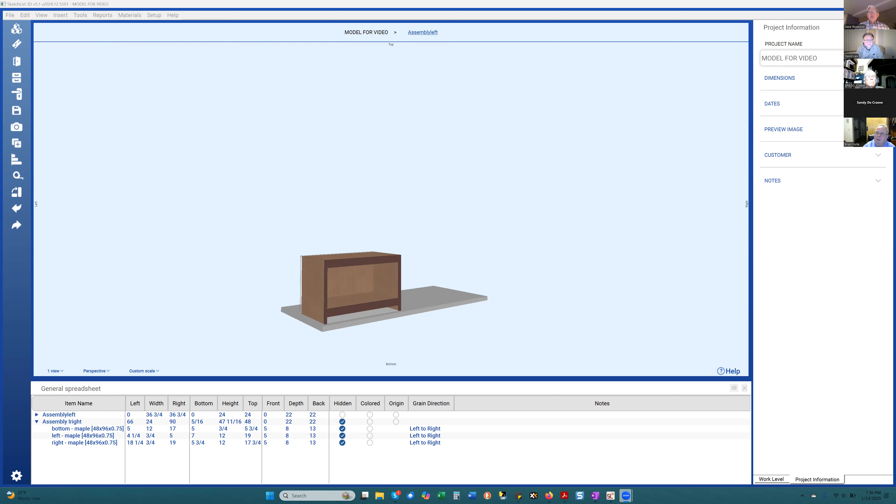That are unique to the way that you build, and then when you're putting something together, and I'll share my screen in a second, Sketchlist is really geared for that. Let me just figure out share. Okay. Yeah, you can see my screen now, right? Yep, all right.

So if you took, for example, this box, right, and you're saying whatever size it is, it's 36 by 24 by 22. What you can do at a minimum is say, in reality, this is a 60-inch carcass, if you would. And you can go in to add objects from the library. This is just a kind of junk collection of mine, but I can come in and say I want to put in...

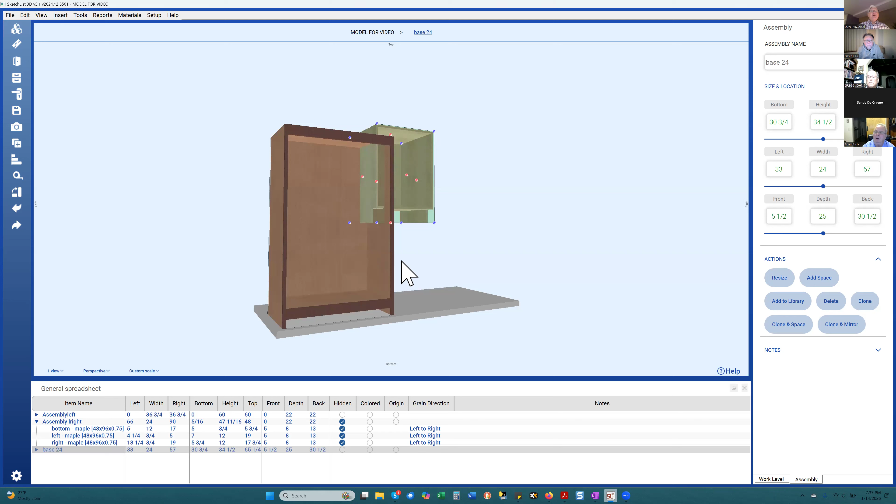This base. I'm kind of making this up on the fly. So I put the base in, and I've got another piece, and all I have to do is align them. To align them, the tool in Sketchlist for alignment, for location, is the blue dot. I right-click that, I copy its values, I come here, and I take that, and paste the value like that. Then I could take this and change its size, so let's say 36, like that.

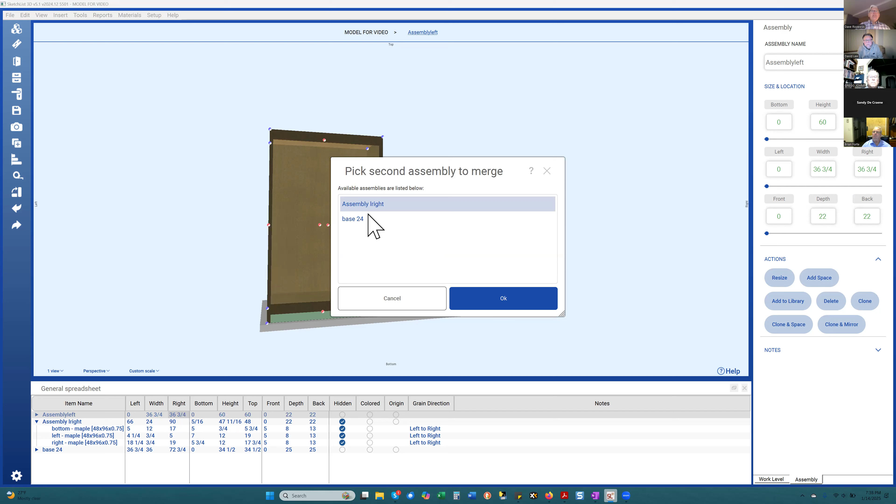And I can even go so far as taking these and, let's see, so we left, I can merge. I can merge these two assemblies and then come up with one assembly that contains the building blocks. And with the library, you can save standard objects down to the board level.

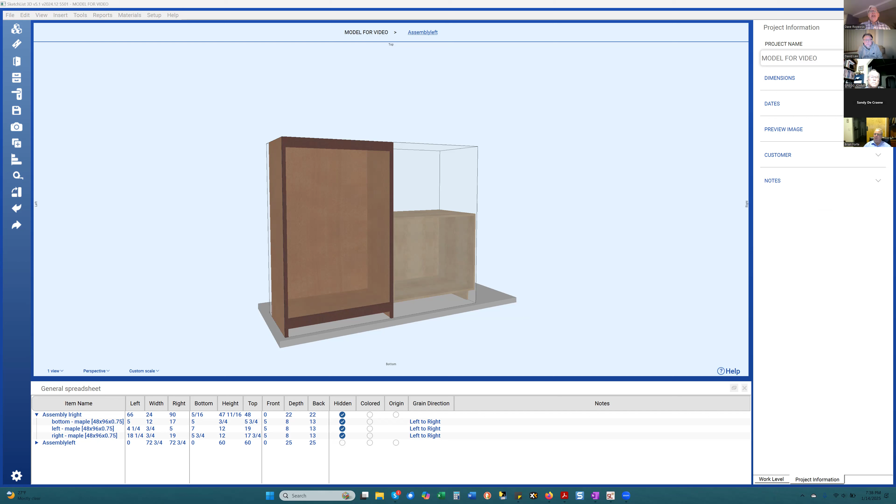If you have maybe a cove molding or something like that, you make it once, then you bring it in and modify it as you decide, or as necessary, and you could make virtually anything. I did a video years back where I took just a box like this one here, and I made it into an entire kitchen in about 12 minutes, because all I was doing was bringing in saved objects and modifying them.

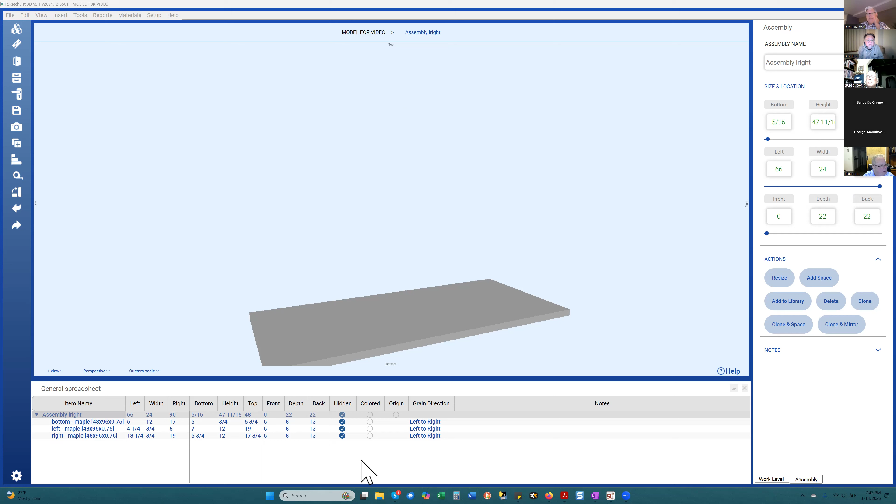So what my solution would be is our notes. Let me pop a board in here, because this is getting us right to where we're going. No, I agree with you. I was just wondering, is there a way that we could look for a standard dovetail?

And then after that, it's just a question of templating. I can create templates, but I just want to be able to visualize in the project within that assembly that an employee can see this is where a dovetail goes. Right, and then they can look at notes for the template they need to use. Exactly, exactly. How big is this board?

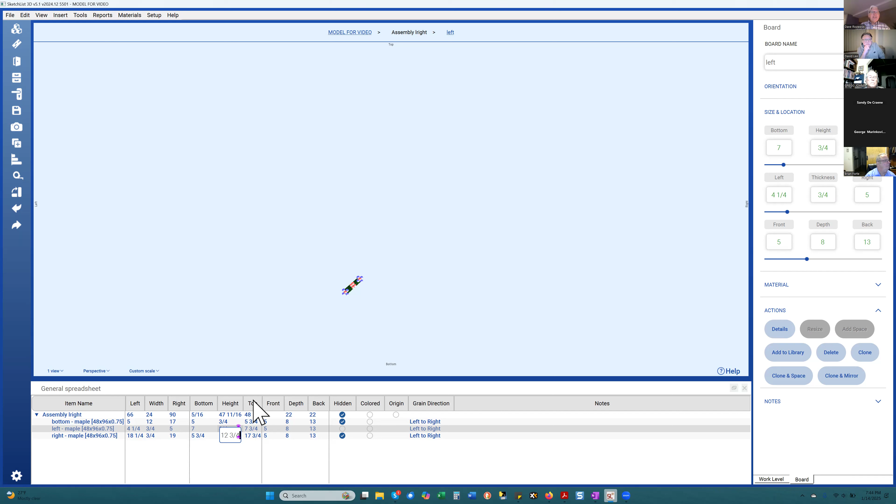This board is 12 inches tall. So say I wanted to make it big enough to have some dovetails cut on the top. Well, what I really wanted was 12 3/4, like this. I'll get into these tools later. So now you've got essentially an extra 3/4 up there. And then you could put a note in.

Oh, I'm sorry, I'm not sharing. Am I sharing? You are. Okay, you could put a note in here. And notes are actually very powerful, because you can put those out on the cut list and the parts list and so on. And you can say dovetail, 10 degrees, or however you want to specify that.

So when you get your parts list coming out, you say, well, include the notes. And then the guy who's cutting this says, oh, okay, I got it, I know what that means. So the difference is we don't represent it visually. And it would be a time, I don't know.

I hate to say this, but dovetails are not a highest priority, because not everybody works with them. But it is a personal priority of mine. Every time I assign stuff to developers, dovetails just end up at the bottom of that list, I'm sorry to say. But if you're going to work on it, I'd be happy to hear from you and see what your needs are, because someday we'll do it.

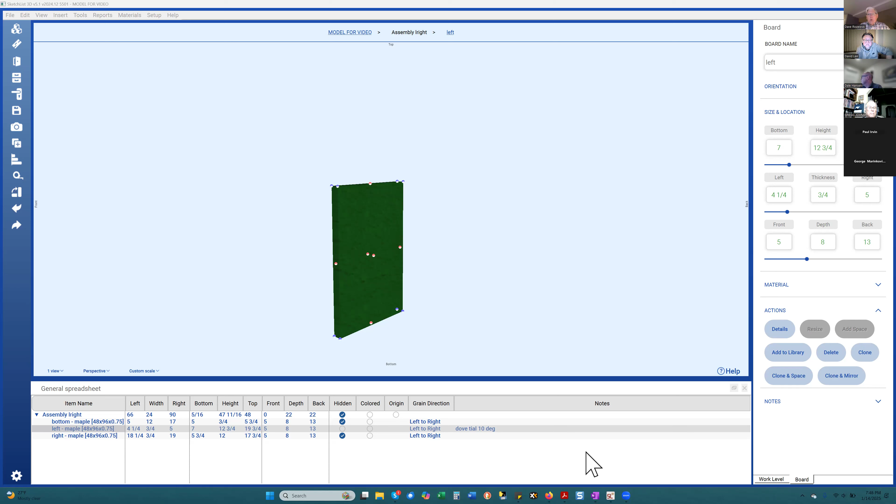Okay, that's the nature of things. Sometimes somebody does something a little bit different. It's a great product, I love it, and it's just like, oh man. Well, it's funny, I'd say this for a long time, that people are like, quote, buying software, but honestly you're kind of buying into a relationship, because we can't do everything perfectly all the time and things go wrong. If you just communicate, we'll say, all right, well either we're committed to fix it or we're not. But I'm personally very committed to fix things. So the communication is key. It's really key. We get so much good feedback in terms of problems and ideas from users. It's just very rich for us.

So do that and let me know for sure. Okay, we'll do. I don't know if you have my phone, but there it is, it's in the chat. Anybody can feel free to call me if you have something to communicate.

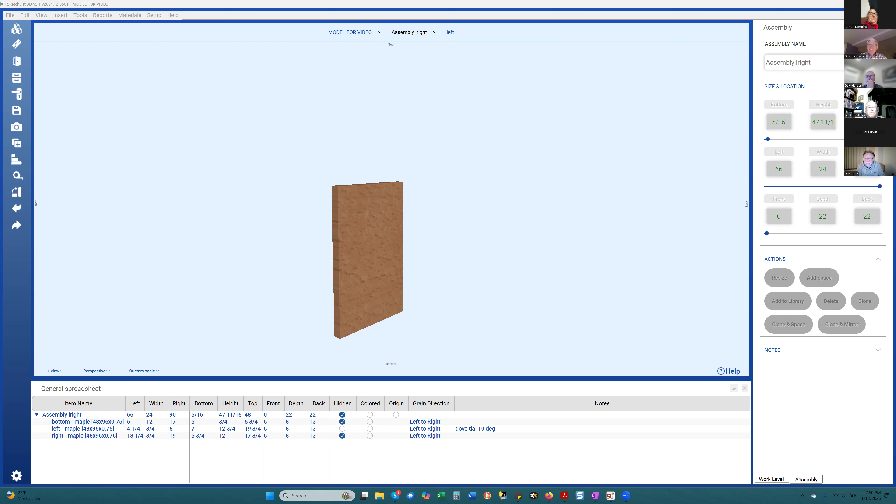Yeah, I was working in a drawing that I had done a couple of months ago, messing around with all the different things you can do with this. I get amazed, but sometimes I'm amazed myself at how I get caught in a spot and can't get out of it. Right now, I can't click on my chest of drawers on a board to get all the little dots around it where you can stretch it and all that kind of thing. I don't know what I did, but it's not available right now. Okay, can you see my screen? Yes, I can. Okay, so let's see, where is it?

Show resize points. Okay, let's see, show the resize points. That should be there. Why aren't you seeing it? Well, I probably haven't clicked back in the right place. I'll try this and see if that's the answer. That's something that happens automatically all the time, and you may have turned it off somehow. Yeah, I probably did, because I do a lot of messing around with this, and then I find that I can't get particular information to come back up on the screen because I've clicked on something and I don't know. I just enjoy doing it, but I don't enjoy the results.

Like they say up in Maine, you can't get there from here. Yeah, right. All right, all right. So anybody else? Hey Dave, I have one question.

Brian, shoot. Okay, I got one question about the last update. I've been getting a lot of crashes when I go back into the same project again, and I've been sending in bug reports, and I rolled back to the older version so I wouldn't keep crashing. Do you get those bug reports? Development does, and it's better that way. If I used to look at them myself, I'd get in the middle of it and just slow things down. So it goes directly to the technical support manager and they take care of that. Now, that crashing problem, I am told, is fixed. I have personally never experienced it, so I can't say that I tested it, but they assure me it's fixed. So try the update, and if it happens again, please just call, text, or email me at dave@sketchlist.com, because if it's not fixed, I need to know.

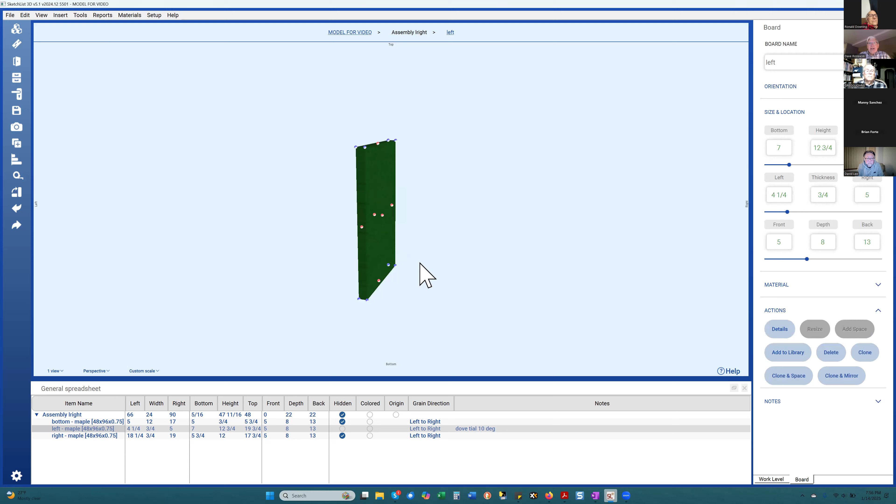So going back in time, almost 15 years now, I was doing woodworking, and I needed to have drawings and things like we all do. I spent a fair amount of time learning AutoCAD and SketchUp, and I was just plain out frustrated.

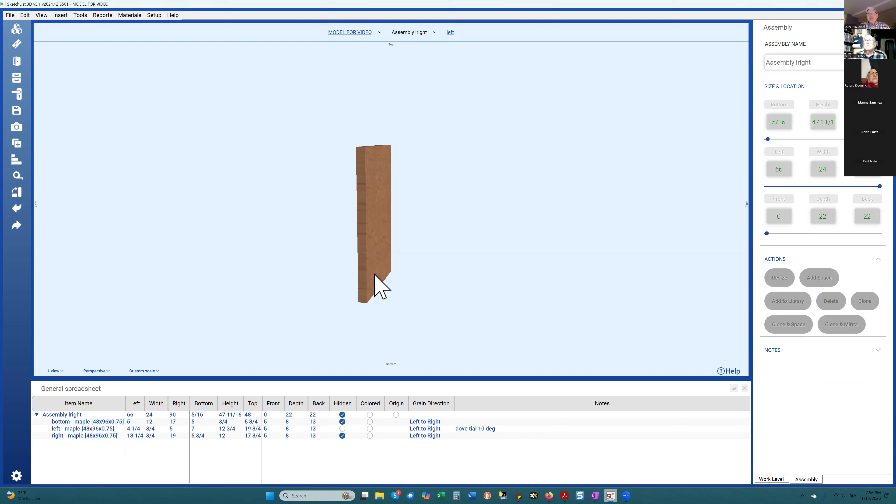I thought it was not right for me, and they didn't have the reports I needed and so on. So I started to fool around with an idea: as a woodworker, what would I like to see, and what are the essential things we do as people who cut wood? It really comes down to you take a board, you make it into the correct size, you put it in the right place, and rinse and repeat. Make another board, correct size, the right place.

There are, of course, a lot of details to that - the curve, joinery, and things like that. But you can accomplish an awful lot just by creating a basic model. And we talked about the idea of building blocks - well, that's where we would go. So I just wanted to get back to basics and say, well, what is a board?

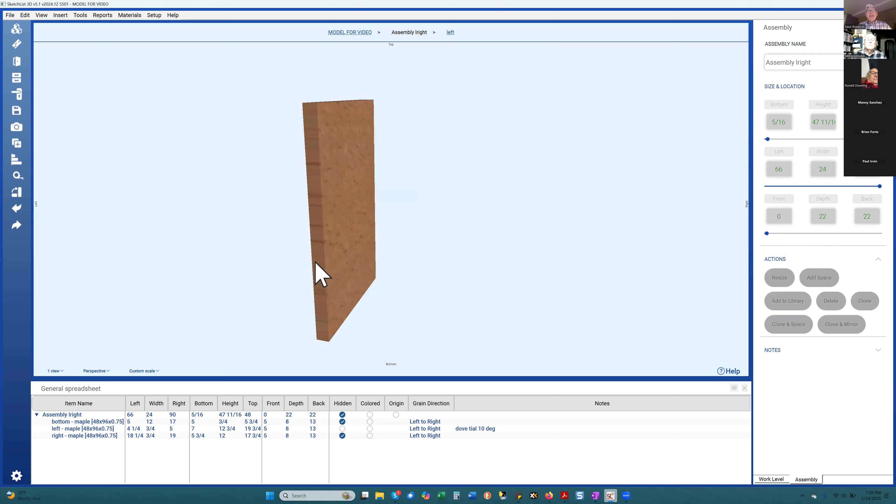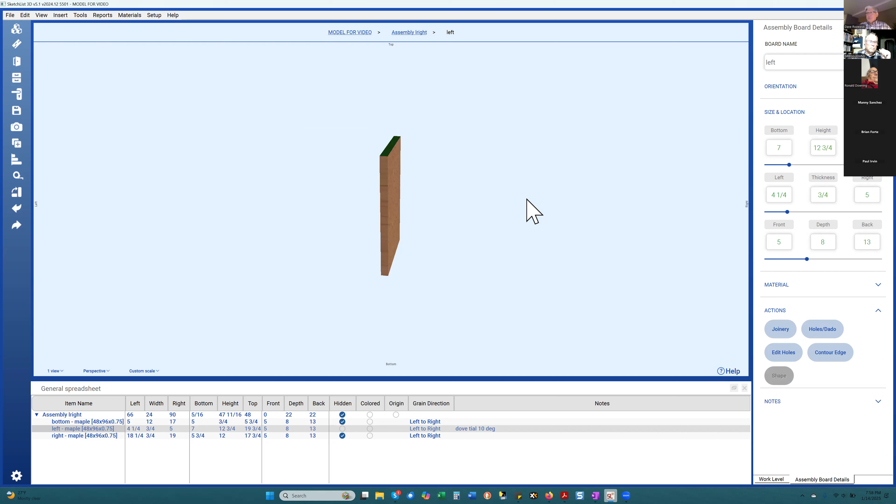A board is a three-dimensional object. It has a height, a depth, and in this case, a width, which is 3/4 of an inch. If I go to the detail of the board, there's a lot of things we can do with the detail. I should add that boards have surfaces - there are two surfaces, surface A and B, and there are edges.

So if I look at this edge, I can assign joinery to it. So I say, let me put a tenon on there, and you can spend some time and talk about what the values are, but the default values - say I was going to have a 4-inch tenon, and I want to center it to fit. That says there's 2 inches at A, 4 inches at B, and 2 inches at C. And I say save. So now I've got the tenon, and you can do that with all kinds of joinery.

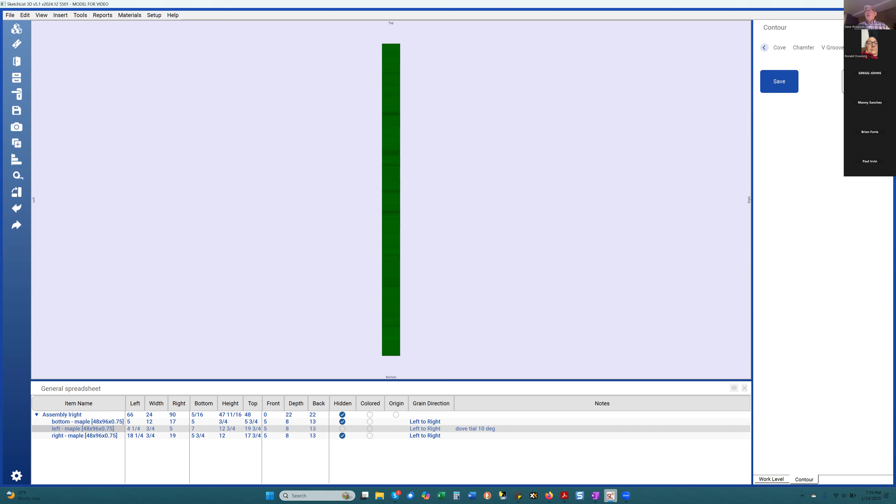The other thing you can do is say I want to put a contour edge on here, and I'm just going to put, let's see, a bullnose, just accept the defaults like that. So now I've got those two things. And in addition to that, you can shape a board.

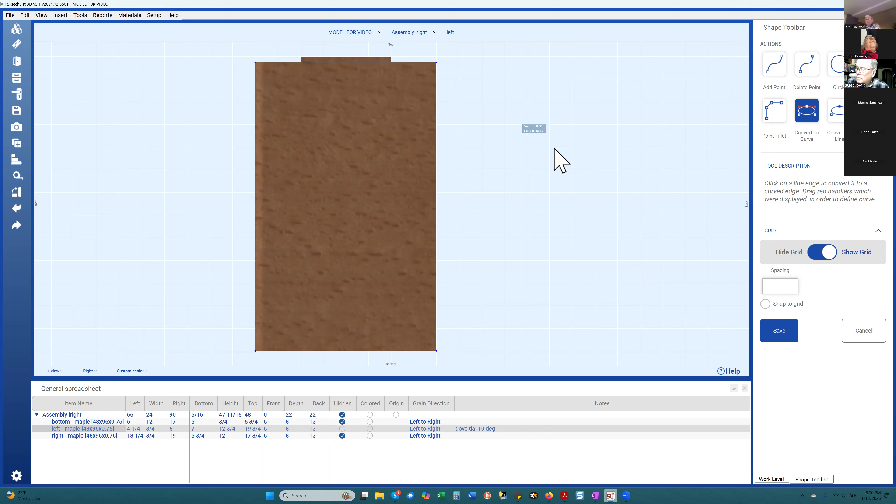Manny, this is your thing about curves. So I go into the shape tool and I say, I want to convert something to a curve. So I grab that edge. Okay, well what it's saying, and I forgot this, I'm sorry - what it's saying is because there's a joint on this edge, I can't do the curve. I should have done the curve first.

So what I'm going to do is get back to that, but I'm just going to pop another board in, and in a bit I'll show you how the boards come about to be. Okay, so I'm going to take this board, go to a detail level, take either surface, doesn't matter, and shape it.

Now what I can do is convert to a curve and take that edge, and you see those tiny little red dots. All you do is just take that and drag them out to accomplish your curves.

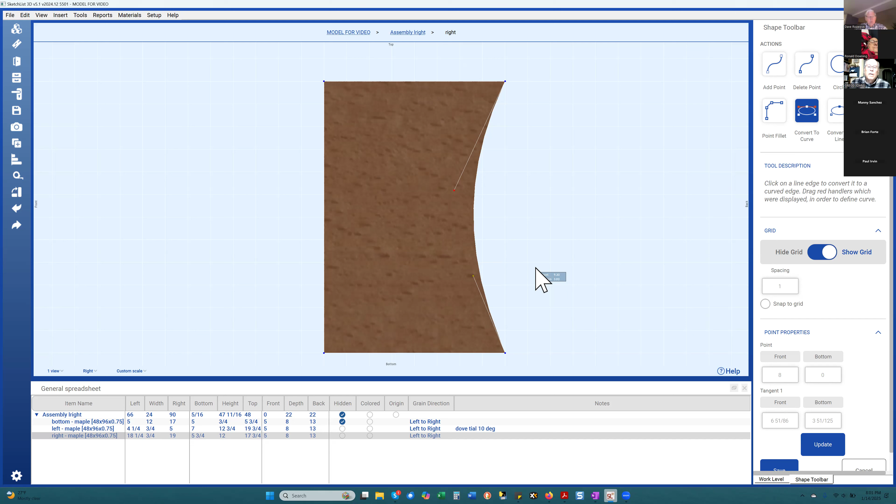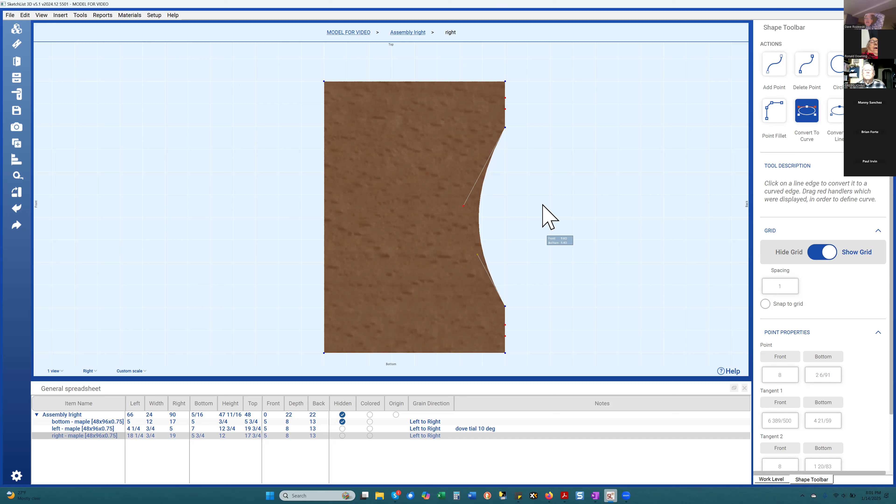Maybe a better way to do that would be, I'm going to insert a point like this. So I'll insert a point. I've gone up to the right side there and picked add a point there, add a point here. Now I'm going to go back to convert to a curve and take this red dot, and you see I've got the curve, but I have sort of a squared off area there.

What you can't do, or you have to plan ahead - I can't go out here because it's going to say no, the curve you want to make is bigger than the board is, and because of that, you can't do it.

But that's it. And then I could do some other shaping - I could come in here and add points, put a point there, put a point there, and then delete a point. If I delete that, that's a 45-degree angle because it's 2 up and 2 over, right? And again, I could take that straight line and make that into a curve.

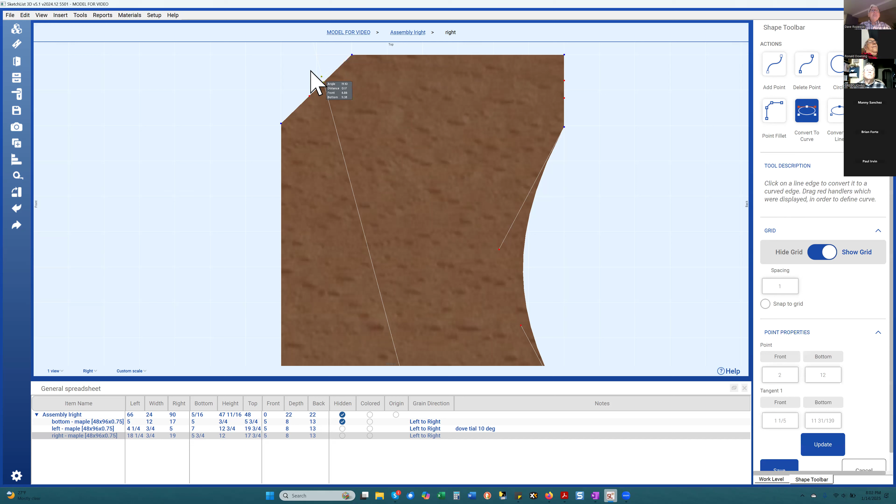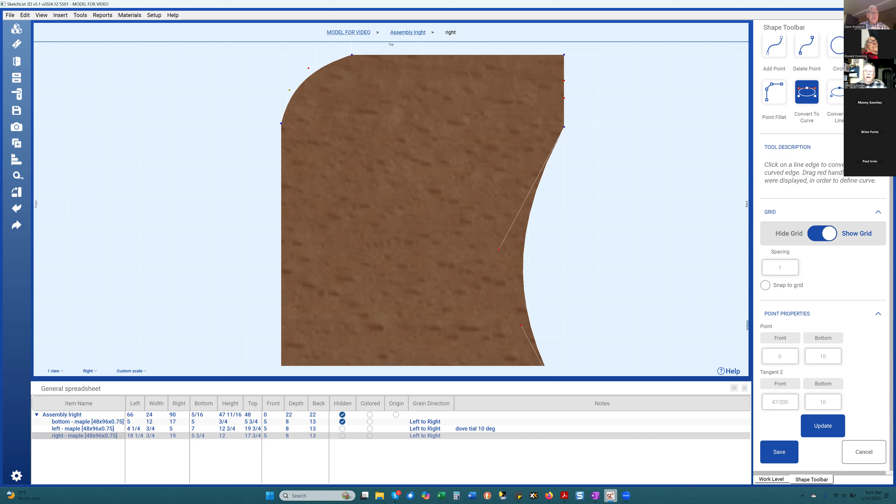And there are, to be honest with you, I don't know enough about this stuff, but you can specify where the bottom value of that is. The bottom value, this is 10, and check that like that. And there you go. Oops, sorry, I'm excluding someone.

So that's it. Then you say save, and you look, and there's your curve. Now, Manny, is that right for you? Is that what you were thinking about? Yeah, that's what I was looking for. Okay, thank you. Yeah, and you can do all kinds of things.

Talking about the dovetails, I actually spent a fair amount of time doing the dovetails using the shape tool, and I would highly advise against it. It's just, it takes a lot of time.

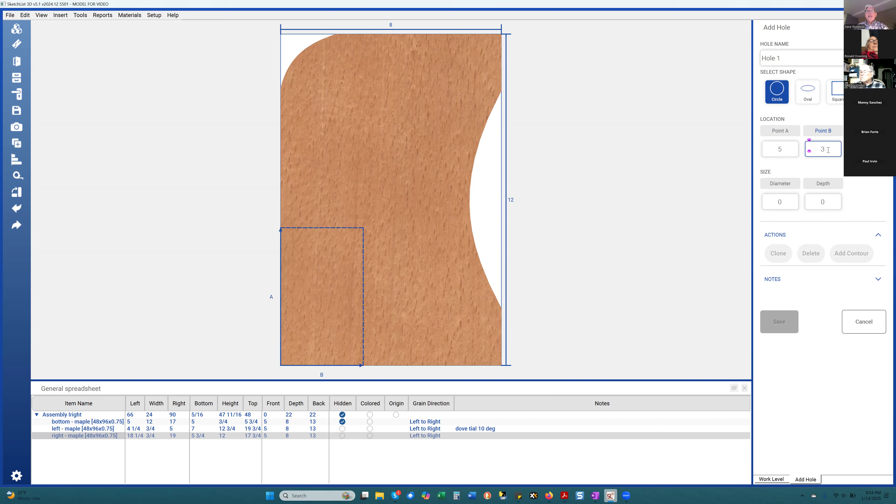But I can come here and take that beginning and say I want to put a hole in there. So point A is, say, 5. Point B is 3, and that takes me to the center of the hole. The diameter is 2, and the depth is 3/4, and save.

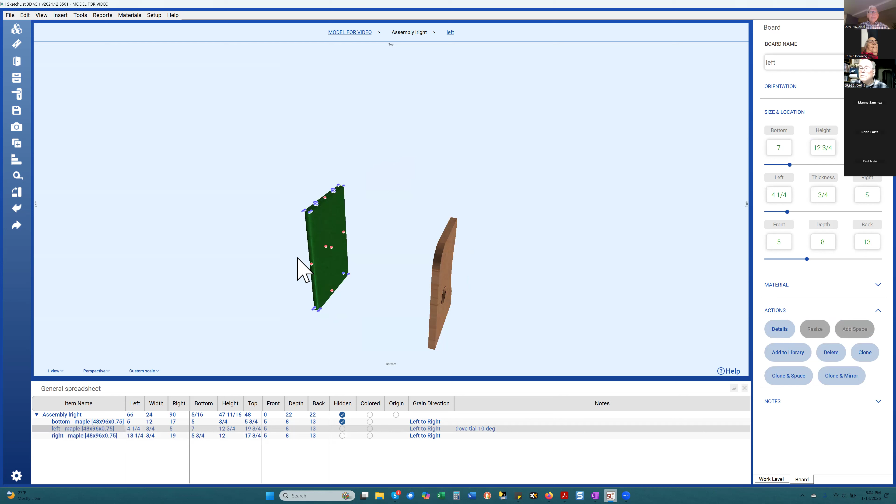So those are the kinds of things you can do with a board. Now I come back to the assembly level. You see that I was able to put some detail on that board, some holes and things. I was able to put the contour on it, and I was able to put the tenon on that. So those are the board detail levels.

And you can go in there, and I could put an individual hole, and then I can clone that hole. So if I had a cabinet side and I wanted to put holes in for pegs for shelving, you could do that and say, now that I've made a 1/4 inch hole, I want to have 12 of them, and I want them 2 inches apart. And it'll just spray up a whole series of holes for you.

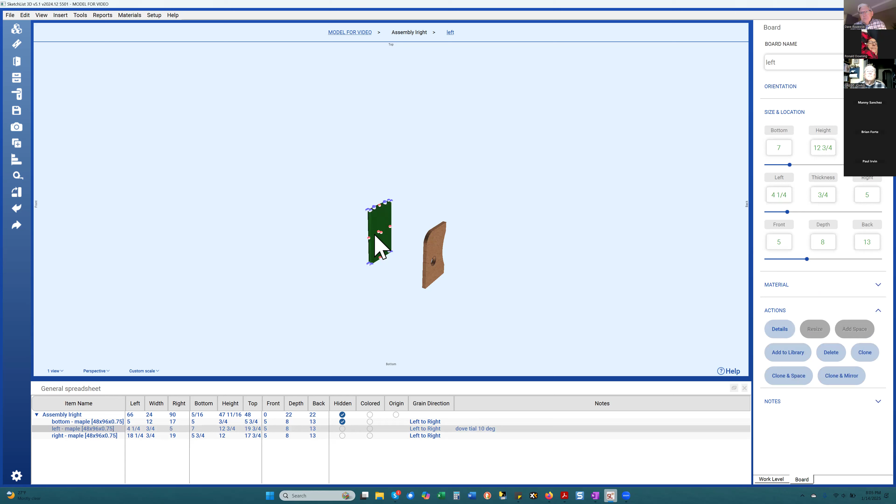And again, getting back to the building block approach, you could take this, and I could add that to the library if that's something that I'm using all the time, and just not have to do that work again. So we have boards, and we have that amount of detail available to us.

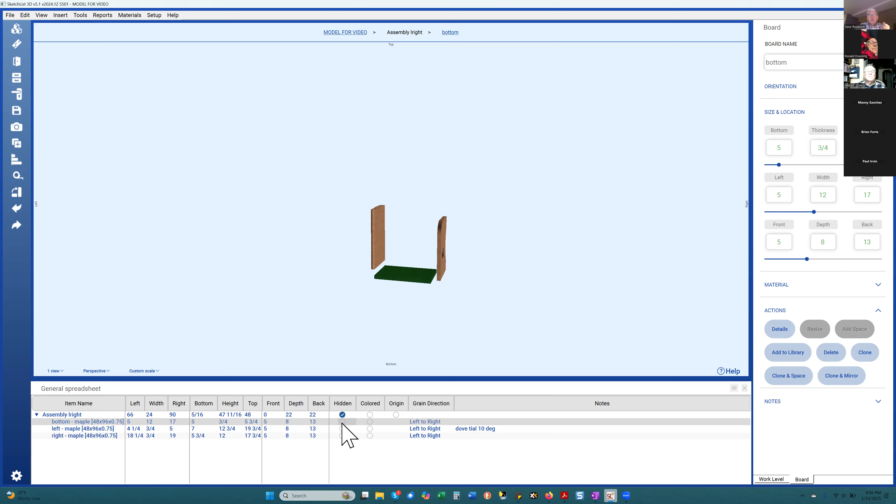But the real trick is there's 2 steps. It's to size a board and then to locate it. So if I pop in another board, let's say the bottom board, okay, and these are the tools of Sketchlist. There are only 3 tools that do everything. So if I want to have that butt up against this, what I would do is select that blue dot.

And copy the values 18 1/4, 5 3/4, and 5, and then take this and right click that and paste those in there, and you see it's popped right in there. And I could do that again here. Say I want to copy those, and I want to take that and paste it, and there you go.

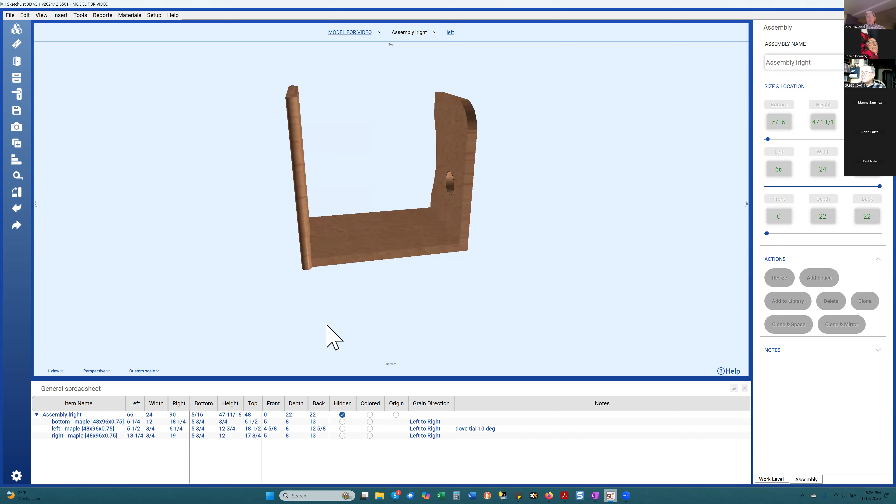So that's really what we're doing, is we insert something. In this case, we're inserting boards, and then we size them the way we want them, and then we locate them where they have to be.

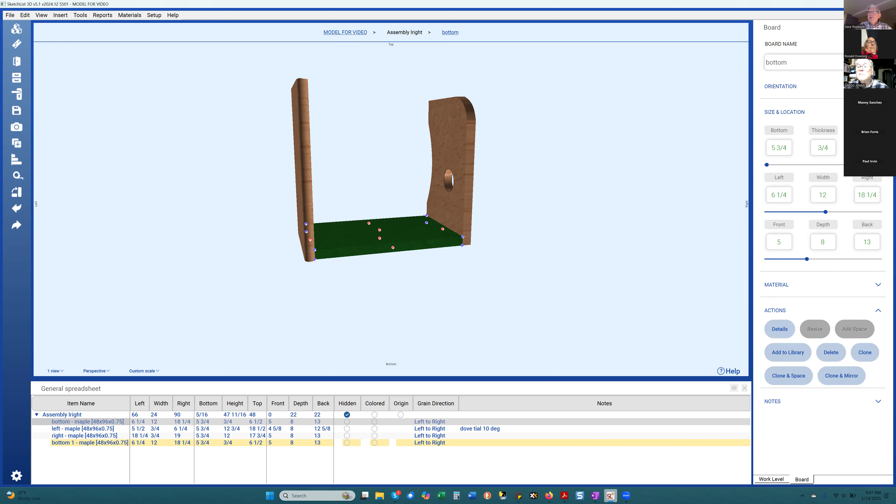So say I could take that board, and on the right-hand side of the screen, I'm going to click the clone button, and just look up here. And the top of this board is 17 3/4. So I'm going to make the top of this board 17 3/4 from the bottom, like that.

Now I look and say, well, I'm going to have to take this and just push it back a bit so it fits in there.

I mean, I'm just kind of freewheeling here, but it reminds me of the kind of project you do in high school woodshop, right? You take it home, or 8th grade workshop, you take it home to your mom and say, oh look, I got you a shelf. And she goes, oh yeah, it's a fireplace. Anyway, so that's the whole thing.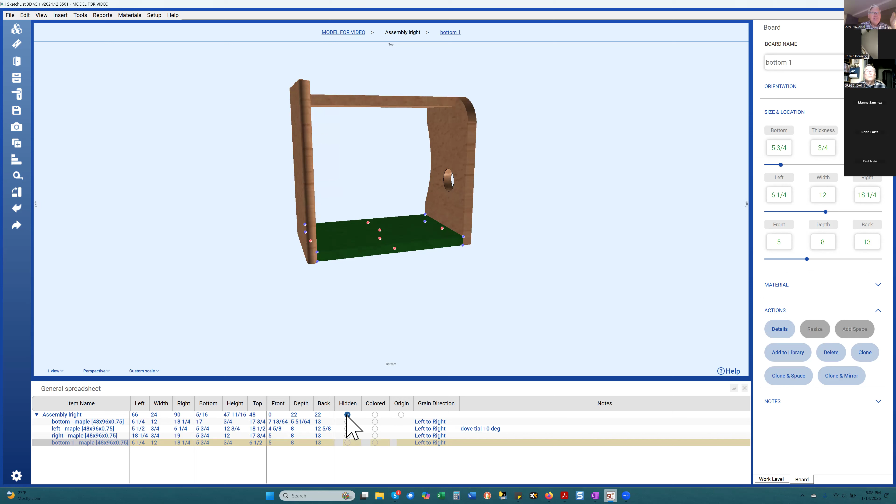You're working with boards, you size them, you locate them, and that's it. And that's what allows you... let's see, where am I?

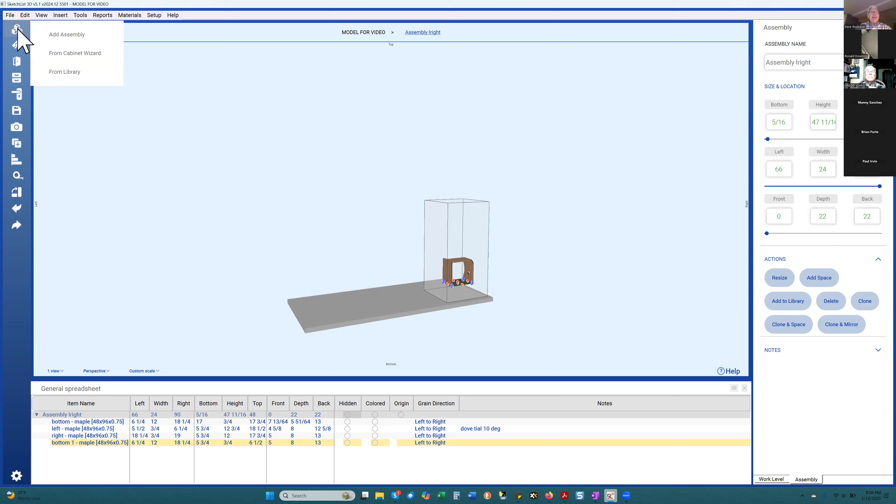Okay, that allows you to make things. Now, one of the ways Sketchlist helps you manage this is through a concept called containers.

I'm going to add an assembly, which is the calculator in Sketchlist. It's 3 columns and 3 rows that can size and locate any object in 3 dimensions. Say this is going to be 18 inches. When I enter the 18, you see it can be up from the bottom or down from the top. I'll say down from the top, so the top is now 18.

The width, let's say the width is going to be 4, 12, same thing, and I want that from the left. And then finally from the front, I want 3 inches, shoving that to the back. All I'm doing is creating this assembly in which I'm going to insert boards. And there it is, okay?

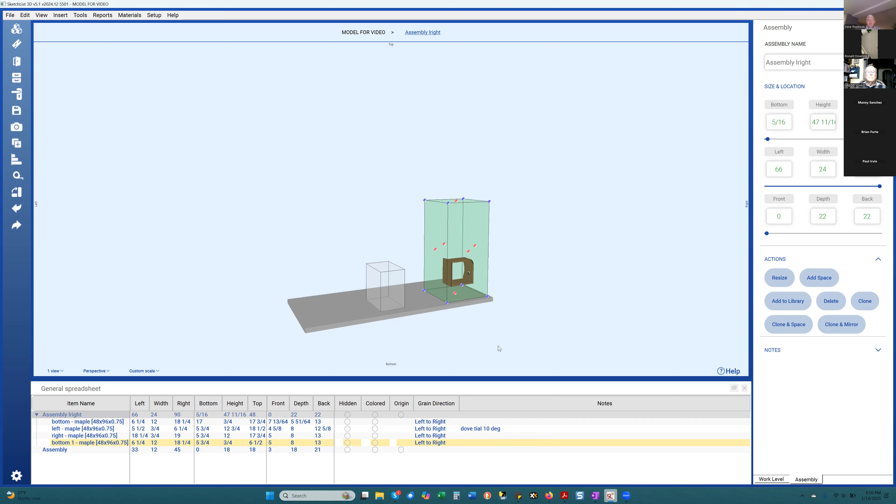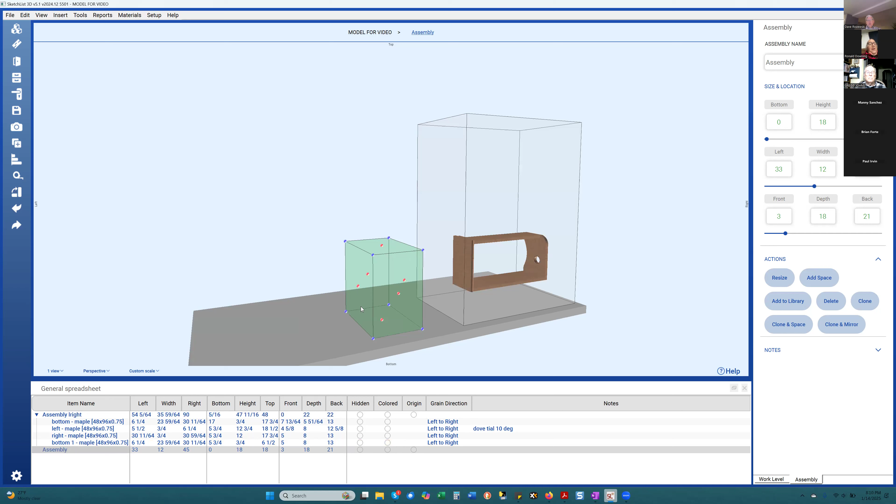Now, in order to insert boards — I should stop and say the advantage of having these containers called assemblies is it will allow you to take all of the elements or objects within the container and treat it as one object. So I can stretch it over there a bit, and you see the internals have changed dynamically. It doesn't make much sense with my wonderful design, but for a standard cabinet, and getting to David's point about having a library, if I bring something in or create something, I just have to create it once. We're going to do that, and I'll show you how that goes in the library. I'm going to keep that.

So I want to add a sideboard to the assembly. In order to do that, up on the upper left-hand side, there's an icon that says add board. Again, the board is the most basic building block, and there are 5 pieces of information: a name, left side in this case. Where do I want to insert it? I can put it into the right assembly or into this thing called assembly, and I choose that. If there were lots of containers like drawers and doors and so on, they would all be listed here, and you could say I want to put it in that particular door or drawer or whatever.

So you have a name, a location, and then you pick a material. I'm going to take this oak material, like that. So those are 3 of the pieces of information. The 4th piece is what's its size? Well, for a sideboard, if you think about it, that looks like a sideboard. Its thickness is the thickness of the plywood, and the thickness runs right to left.

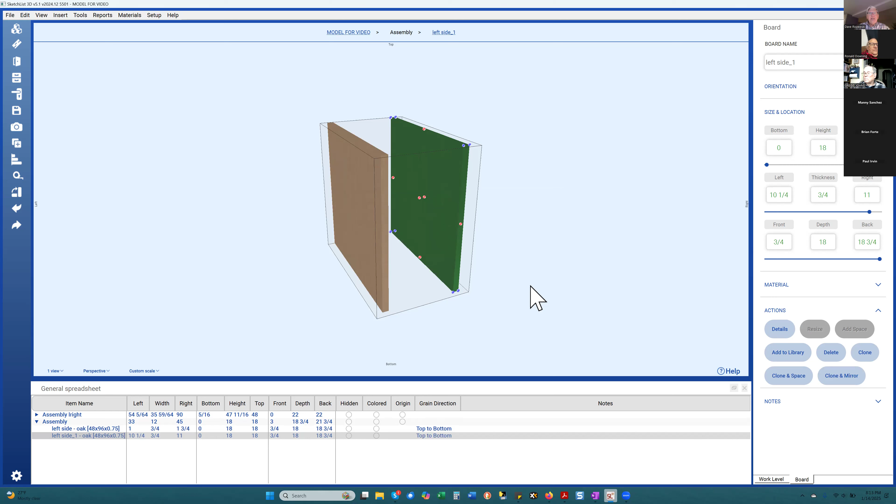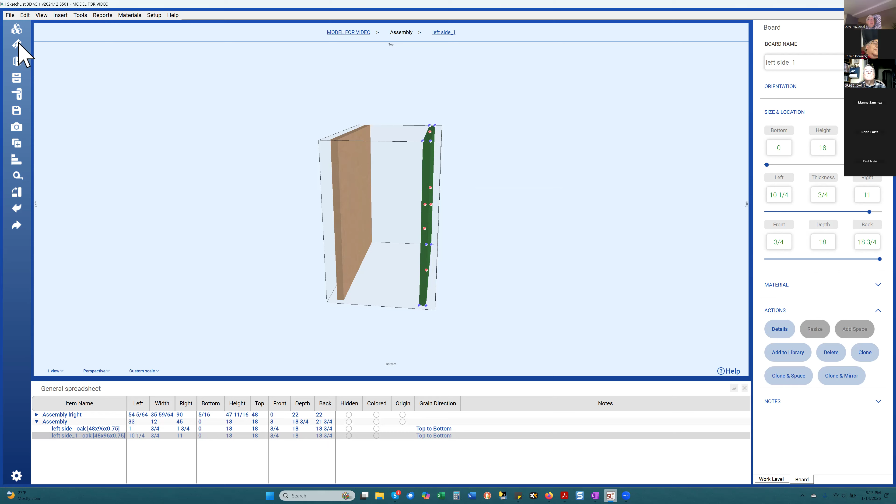Now, if I want to work on the boards in that assembly, I have to go into the assembly level. And I have the board, and there are a whole series of tools that help you continue building. So here I'm going to say clone and mirror, which makes an exact copy of the first board but flips it. So if I had, say, a mortise running here, on the flip it would be on the inside. Or if I had shelf holes for the pegs, they would be on the inside with a clone and mirror. So I have the two boards, and I'm going to insert another board. I could just come up here, insert a board, and this would be called bottom.

Same assembly, same material. And I say this a lot, it doesn't matter too much. The bottom board is going to be 3/4 of an inch, because that's the thickness of the material, and the depth will be 6. I just do that because I don't like to think that much. The grain direction is going to run this way. The left edge of that board is going to be 3/4 of an inch, so it can clear that sideboard. And the front will be 3/4, so it can fit the face frame. And on the bottom, say I put that at 4, like that.

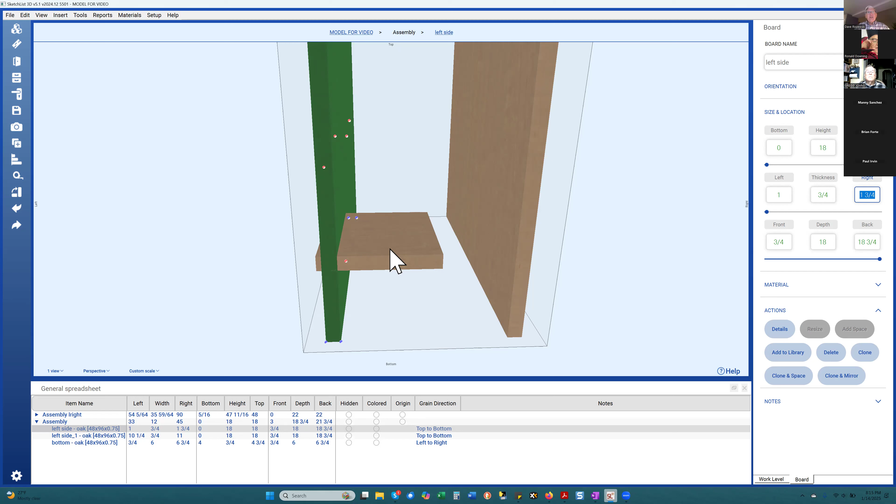Now, okay, I did 3/4, but I forgot that I put it in like an inch. So what I'm going to do is look here and say, if I see on the right-hand side, the spreadsheet, the right side of that board is 1 3/4. So I should have made this left be 1 3/4. Again, I turn this, and the options for changing things turn out to be green buttons, and I'm going to shift it over that way. Now what I can do is just take this red dot, hold down the shift key, snap it over until it snaps. Quick check. The left of that is 10 1/4. The right of that is 10 1/4. Perfect. The back of this is 18 3/4. So I come here and say this is 18 3/4, and I got my shelf.

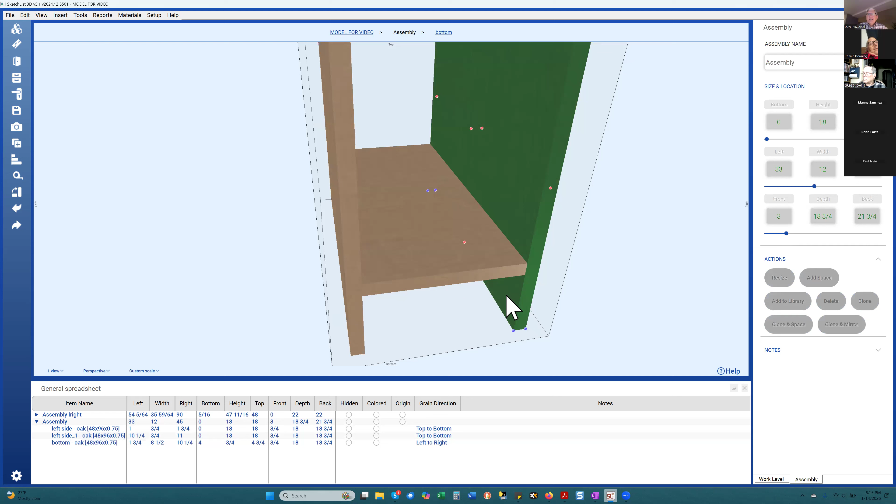Is there a question there? Yeah, Dave, on your board thickness - if the library is listed at a 3/4 inch thick board, and my actual usage is a 1/2 inch, will it accept it, or does it not like it because of the different size values? It'll accept it.

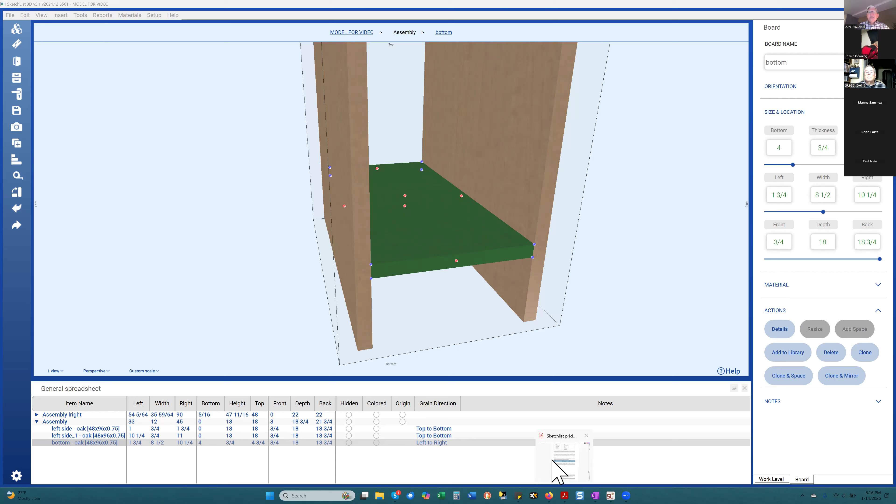And then what happens when you run your optimizer, you'll get a warning that the cut size of that board is less than the material size of that board. Which, if you're dealing with solids, might be legitimate, because maybe you're going to plane that board down to a 1/2. With plywood, not so much, but it'll accept it, and it'll give you a warning. Okay, that's what I had too last night. So, okay, thanks. Okay.

And then let's come here. Again, a lot of the efficiencies are from tools. So I look there and I say the top of that is 18. So I'm going to clone and space these from the bottom. And I'm going to have 2 equally distributed, so it's going to figure out the spacing such that the top of this is going to be 18, because that's the top of the sideboards, right? And I clone that, and oops, and there it is.

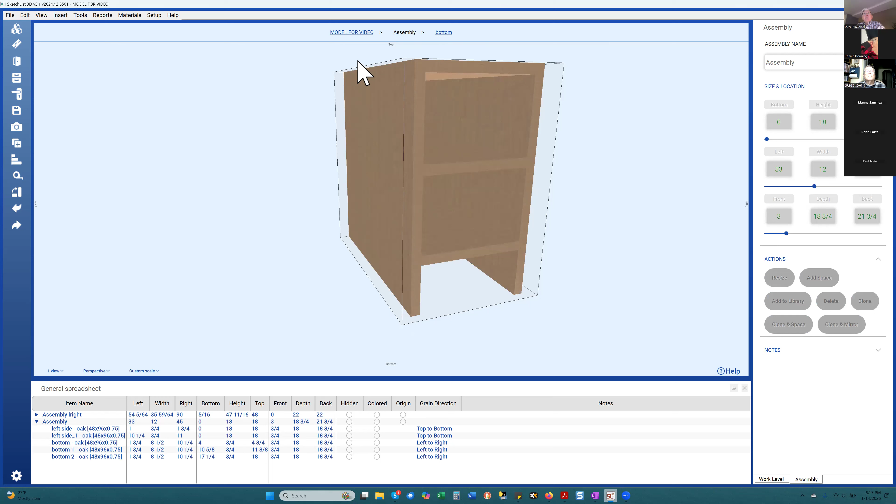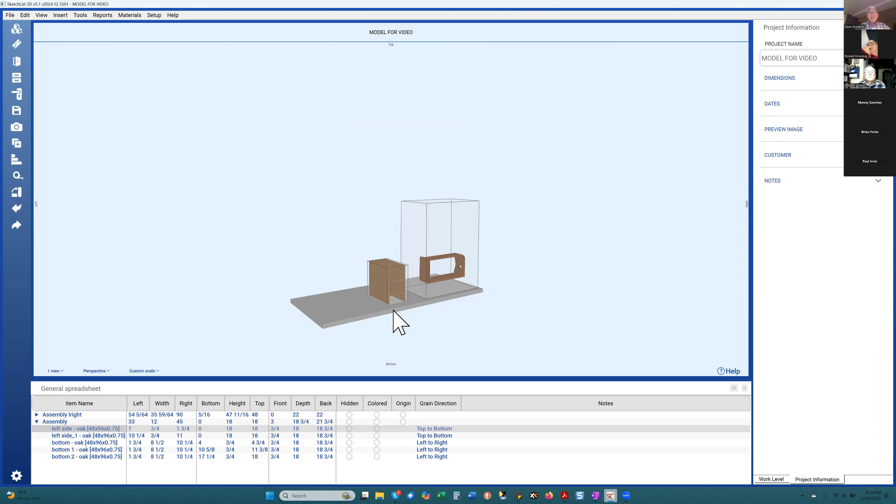So now I've got kind of a basic carcass or structure or something. And here's where you can go in and at the project level, I'm gonna have to - whoa, that wasn't very good. My mouse is disobeying me. And just as I was trying to correct it, it fell to the floor. So you have, if you go to the project level and you take that - oops, I hit something.

Take this. Now I can say add to the library, and I could put some notes and things like that and save it. And however you build this with whatever joinery or detail that you want, that'll come out in the when you call it in to use it again. I'll show you that in a minute. It's taken a second to... Here we go. Okay.

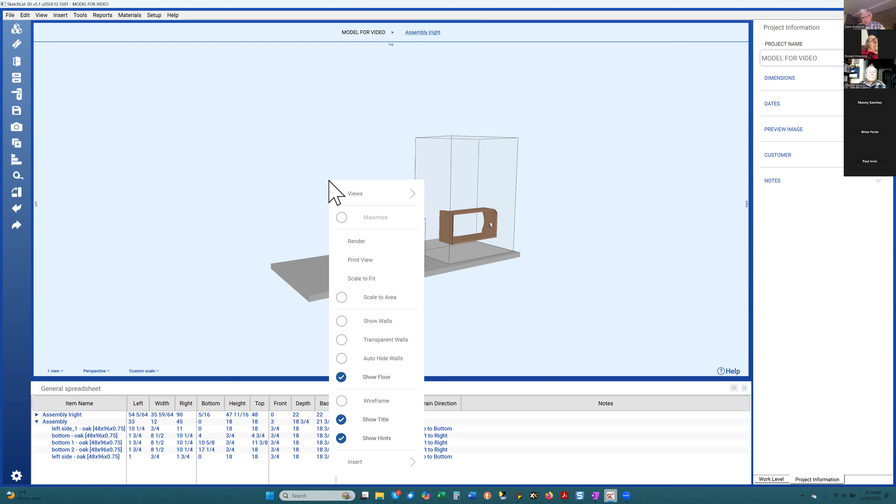Now what I can do - I could take this and then say... gosh, this mouse is just awful. I think it has something to do with all the oil on it.

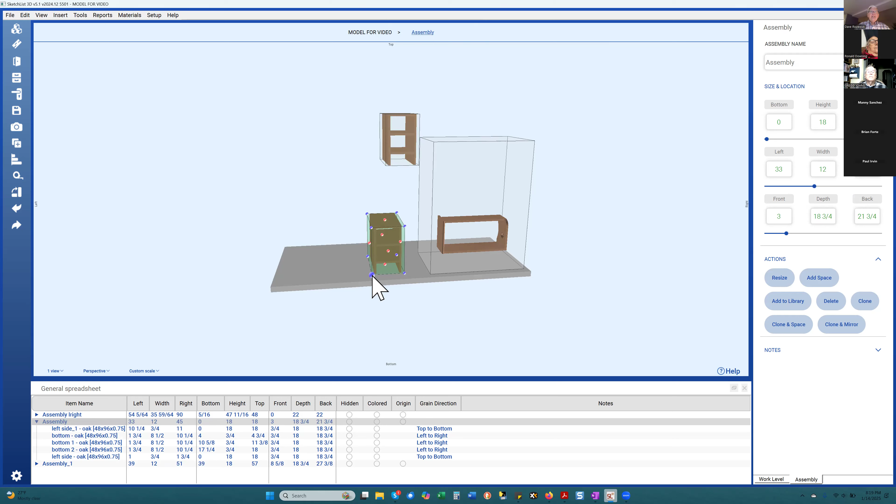Okay, let's see. So if I go here now and say I want to add something from the library, I go down and pick that which we just created and add it. And there, there's your building block approach. So I could take that and copy its value, just like I did before. Take this and paste its value. Like that. And of course, the separation there is because of that inch that I had in there. But then you can take this and change its top to be 60, for example. And then you've got another configuration of that design.

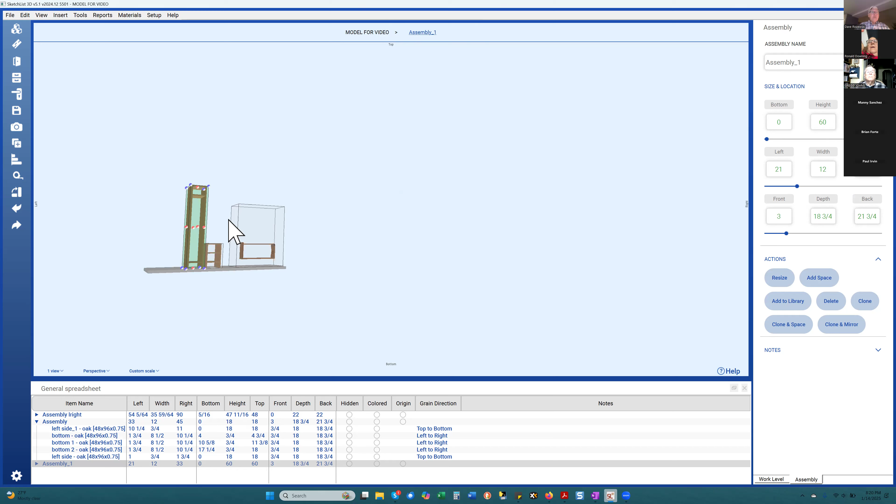Okay. So obviously the boards are important. And so we talked about how to create a board, how to detail a board, how to size and locate a board. And then this idea that you have containers. The most substantial container, of course, is the project, but you have containers called assemblies. And then within the assemblies, you have containers called doors and drawers.

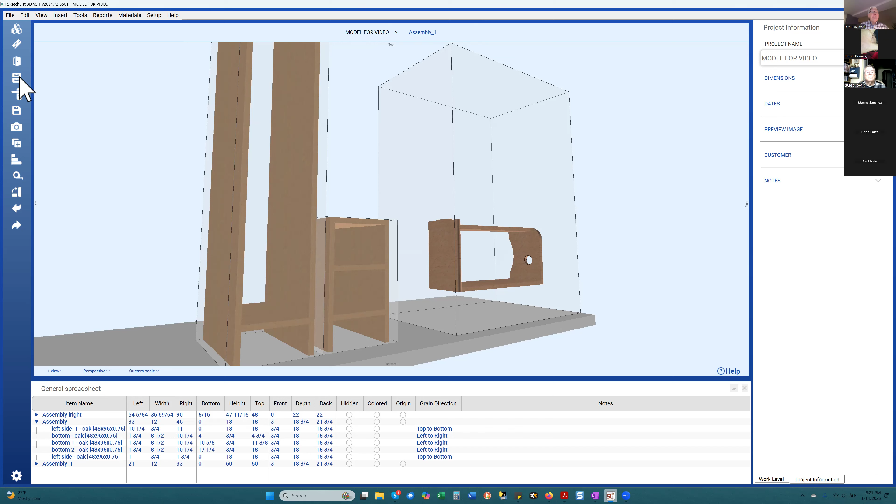So if I did that, I could just come up here and say, I want to add a drawer. The bottom would be 4 3/4, I'm guessing. And the height will be 6 inches. And I'm going to change the top like that. Then the left will be, what was it, 1 3/4. Width will be 12.

And the right will be like this. And the front will be 3/4. Depth will be, say, 8. And the back. Now what happened is I've got a drawer in that assembly - there we go.

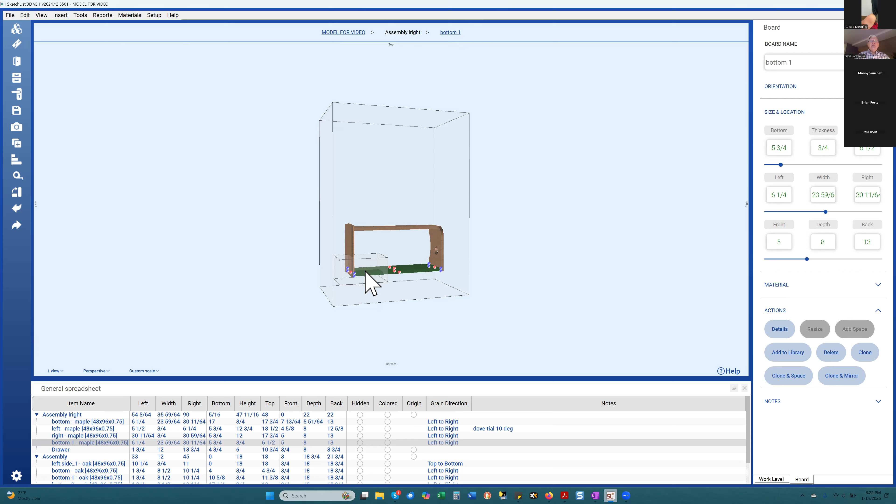I guess I kind of missed it a bit. So I can do the thing where I do the blue dots and bring the drawer. Oh, I put it into the wrong assembly. I wanted to put it in the other assembly.

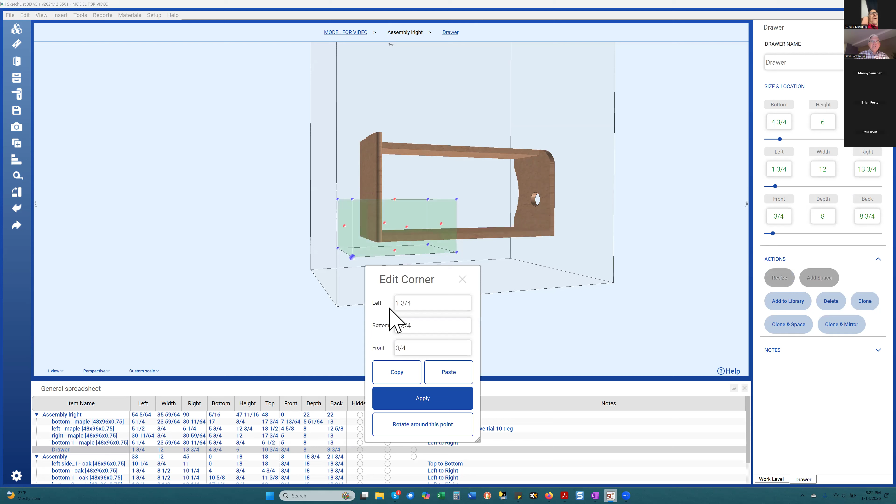So anyway, I put it in the wrong assembly, but now we have a drawer, and what I can do is take this, take its blue dot value from that, copy that, apply it, take this, paste it, and that falls into place there. And then it's like rinse and repeat.

What we're going to do is go into the drawer, and now we're going to insert a board, which is exactly what we've already done. And you see here, there's the drawer I want to put it in. Call it panel.

But to make it out of the solid lumber stuff. And then this can be the size of the drawer box. So I look and it's 12 inches wide, and I'm taking that right off the spreadsheet down below. And here's 3/4.

Which in this case is the thickness. The width is going to be the grain direction. Yeah, sorry, got the wrong thickness. The rule in SketchList is everything has to fit onto the material it's being cut from, and that obviously wasn't.

So if I come back to the assembly, you see there's my drawer. You do the exact same thing with the door.

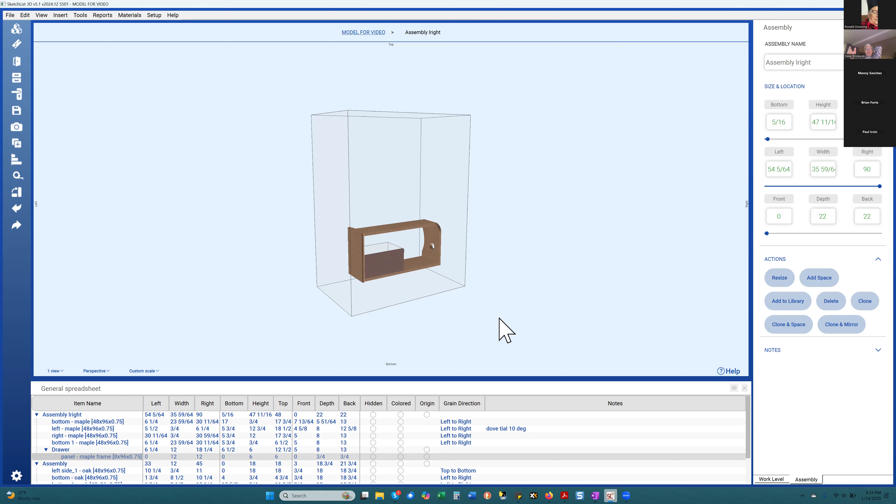So you're creating a container to organize and hold the boards. You put the boards into the container, you size them, you locate them, and to the extent that you want, you provide details to them. And then you're all set.

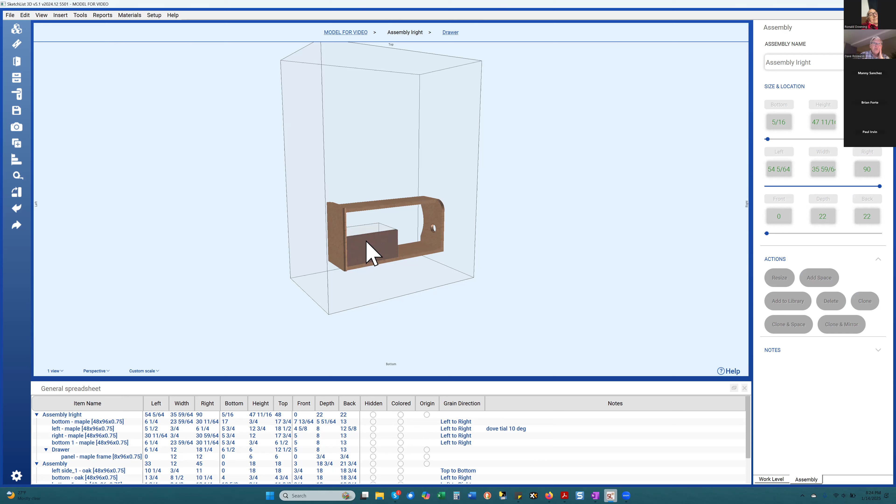Really, there are a lot of tools - I could take things and clone them and space them and such. But what you've just seen, in my opinion, allows you to design pretty much anything you want to design. The tools and utilities are just there to make it a little bit quicker for you, a little more efficient.

So we're moving on to the reports. Simplest report is the cut list, which hobby users have. And what it does, again, is integrated - so if I go into the design and change any of these sizes, it automatically updates this report. You don't have to do anything.

It'll show you here what assembly we're putting these things into. If there's a sub-assembly like drawer, part name, cut size, material, and material name. And you can print that, or put it out to an Excel spreadsheet or whatever.

On the pro side, you have the parts list report, which beyond giving you the basics of a cut list, gives you access to every piece of information in the database. So if you wanted to, for some reason, have a report about holes, you could just pick the hole height and its size and so forth, and report on that.

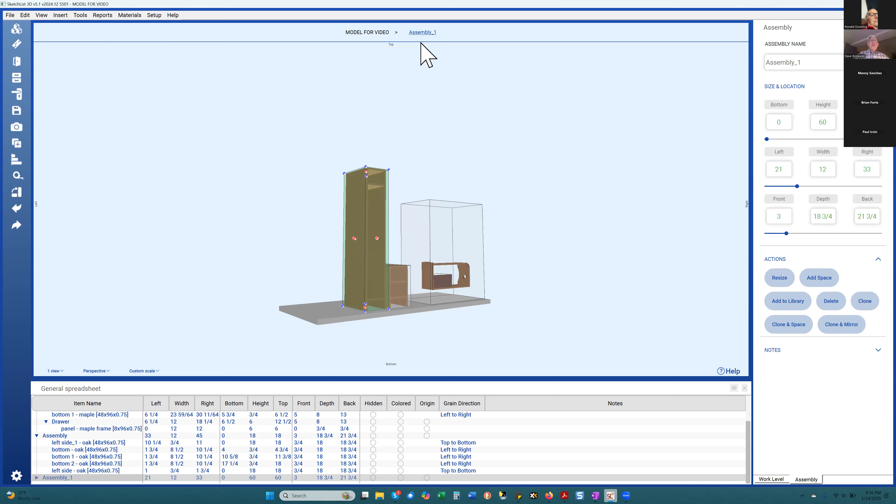The next report that I'll look at is the shop drawing, and that's actually under Tools, Shop Drawing. And I want to change this up - I want to take that and go to the assembly level.

Now, just to explain, I generated a shop drawing at the project level, and I'll do that - shop drawing new. What you're going to see is a two-dimensional drawing, and you can change the view. So I can change this to the top or bottom or whatever, and you see it. Okay, front, like this.

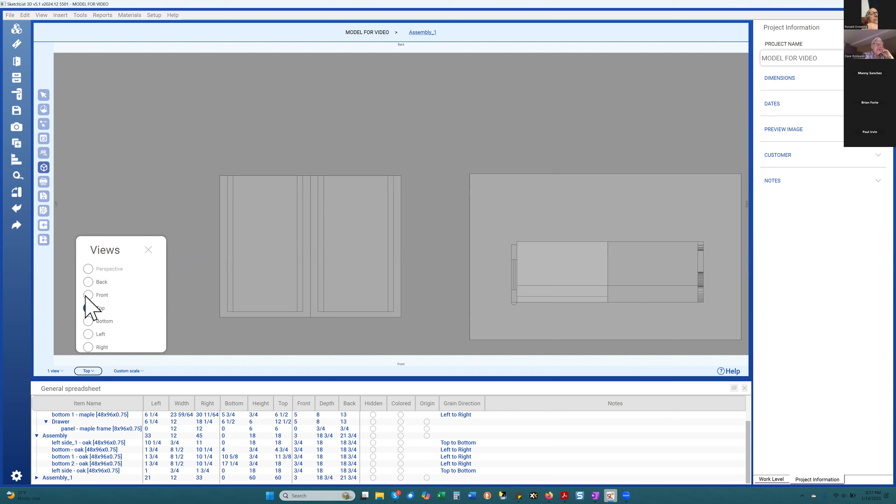And the only thing is you can't get into these assemblies at this level - you're at the project level. So there's two tools: there's a line tool. So if I take that, this is just telling me the size of the assembly. Doesn't do anything more than that.

And I could take this and put it up there and so forth. And then I have a pointer that says, what's the distance, say, from here? Here to there.

And that's 9 inches effectively. If you wanted to, I could take the arrow and flip that so it tells me the angular distance between those, or I could even flip it out and it would tell you that distance.

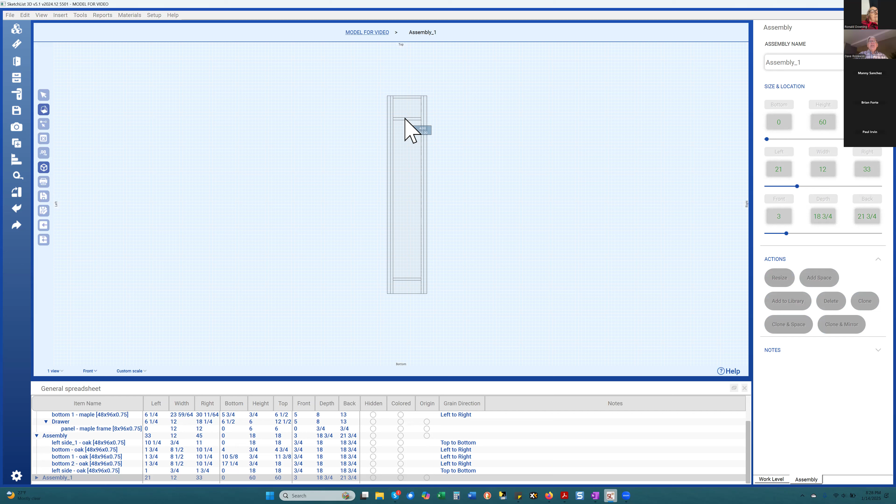So that's the basics of the drawing tool. What I do is get out of there - no, I don't want to save that. Then if I go into the assembly level and do tools, shop drawing, new, it's the same idea. But now I can actually go in and take this board.

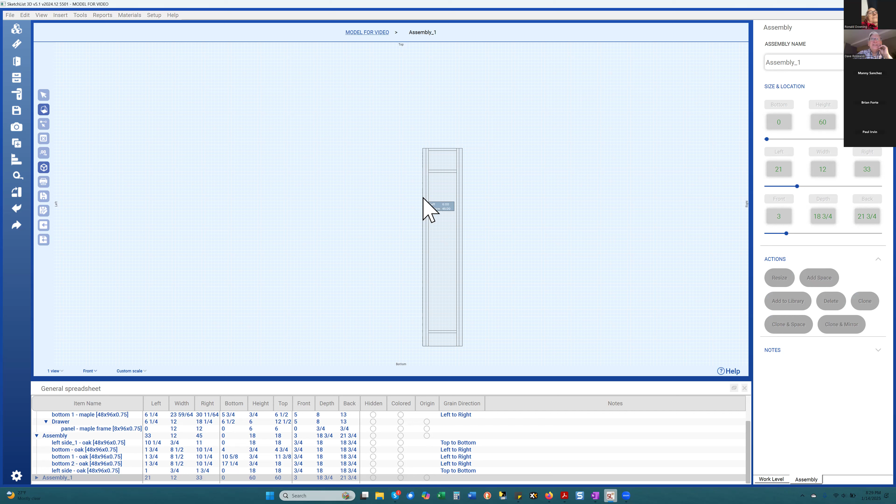Take that board, take this board, take any board, and I can show that. I can come in here and show that. I could go into an individual board and show you the thickness of that board and so on. You can make as many drawings as you want, and you might focus on one area, then make another drawing of the same view and focus on another area so you can grab more details. Did someone have a question in the middle of that?

Hey, Dave, yeah, I have a question. I love that functionality. When you actually do the measurement on that, is there any way to include the angle if you're doing from a diagonal, from an x-axis to a y or something like that?

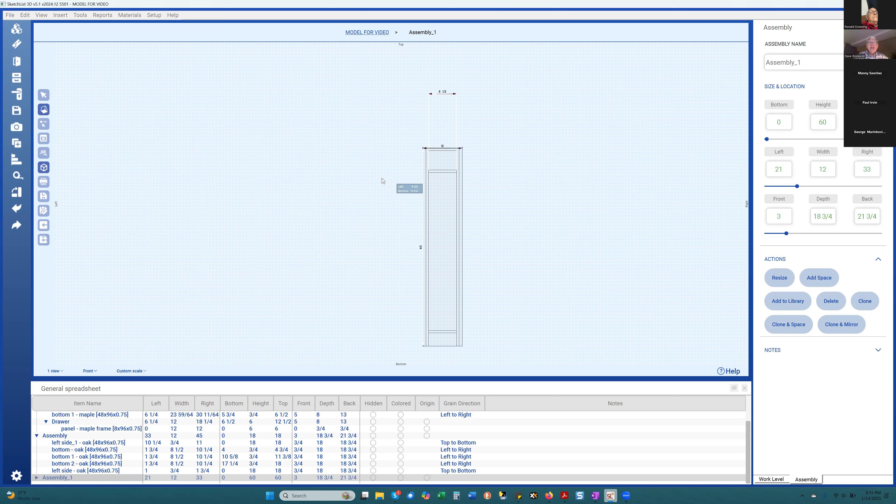No, there's not, and that's the kind of thing I really, really want to have. I want to have it here, and I want to have it in the shape tool, and that's probably it. I hate to say this, but it's just lower in the priority list - we've got other things to chase down. I hadn't seen it, so just wondering if it was there or not. Yeah, no, it's not. Okay, thanks for asking.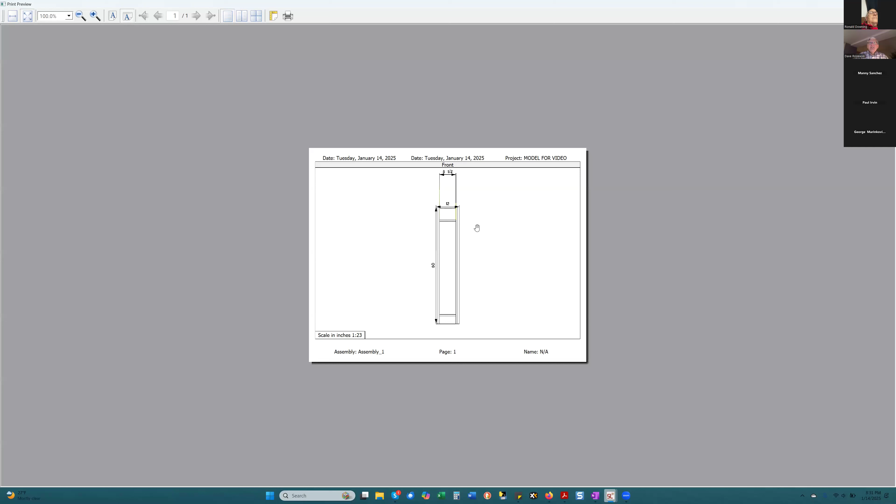Then when you go to print your reports, shop drawings, you'll get this, and you will pick the type of orientation you want - here it is, landscape. You pick the container you want to make the drawings from, and say next. If you have multiple drawings from one container, you'd have a list, and you say, well, I want to draw that one, preview and print. And there it is. You see there's headers, the project name, the date, kind of repetitious here, but you could have the customer name or whatever on that drawing.

Another question? Yeah, I have one. You there? Yep, okay. So down in the cut list, like you add a board, and for some reason you look down the cut list and all of a sudden it's in red. So how do you correct that without throwing off the whole design? In the cut list, like if you had a board and all of a sudden a few of the lines in the cut list go to red, which I'm assuming means it doesn't jive with the rest of the design.

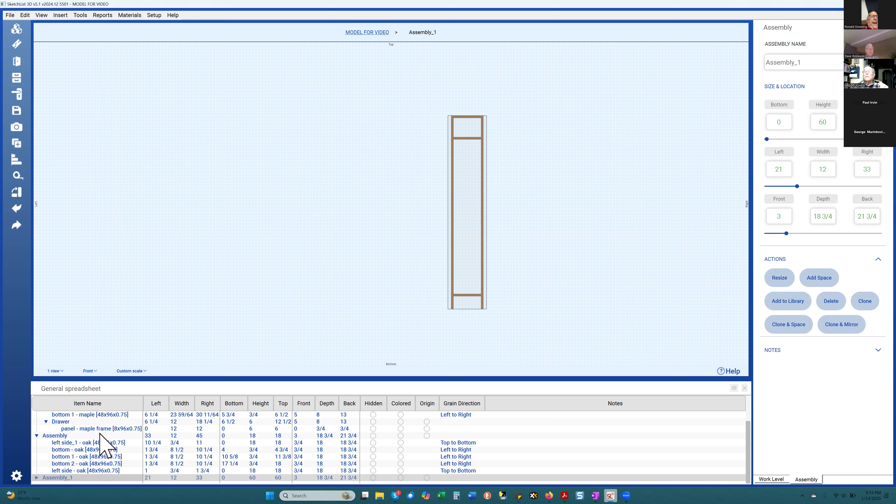Well, I ask you, is it the cut list or is it the optimizer? It's in the cut list - you're just designing the project, you put in a board, and then you look down and all of a sudden there's two lines or one line that's in red. You know, Ron, the next time you see that, if you could grab a screenshot of it, because in all this time I've never seen that. But it just means I haven't stumbled upon it yet. So if you can make that happen, grab a screenshot and send it to me, I'll try to reproduce it. Okay, I don't know the answer to your question. Yeah, Dave, Ronald, are you talking about down in the general spreadsheet? Yeah. Oh, okay, not right down here. Yeah, oh, okay, yeah, you've done it.

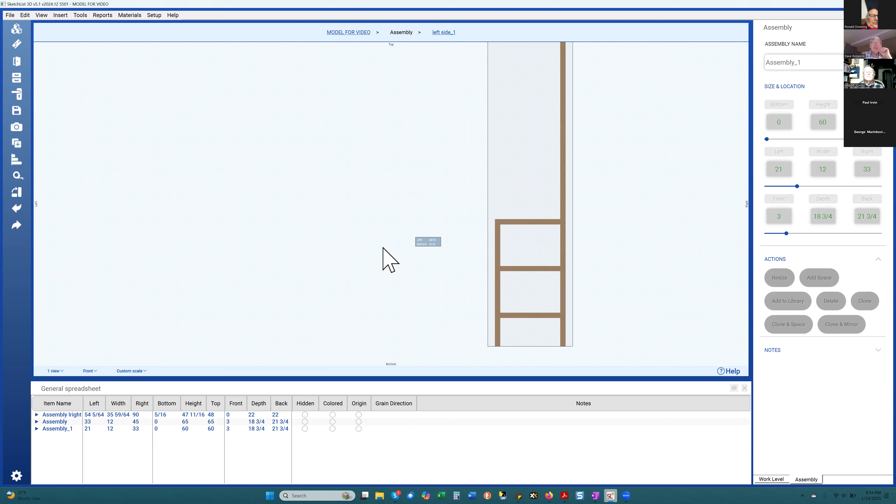So if you do something like say left is, say height is going to be 65, to the top - oh well, that's a bad example, but it does mean that board that you put in is too big for the assembly, essentially. I've got mine set up so it's forgiving and it increases the size of an assembly to make that work, but that's a very bad idea. I shouldn't have it that way because you never know when you're making a mistake. So if that comes up red, what you do is take a look at the board and compare it to, like in this case, right is 45 and right is 11.

So that's all right. Top is 18, top is 11. That's okay. Back is 21, 18, and that's okay. But if it comes up red, it means that one of the pieces has gone outside of the assembly or even the project, and you just look at it and say, well, I made that board too wide. Or the other source of a problem is that you might have selected the wrong direction for the thickness—so instead of 3/4 inch, you might have a thickness of 24 inches. You just look at that and say, that's just wrong.

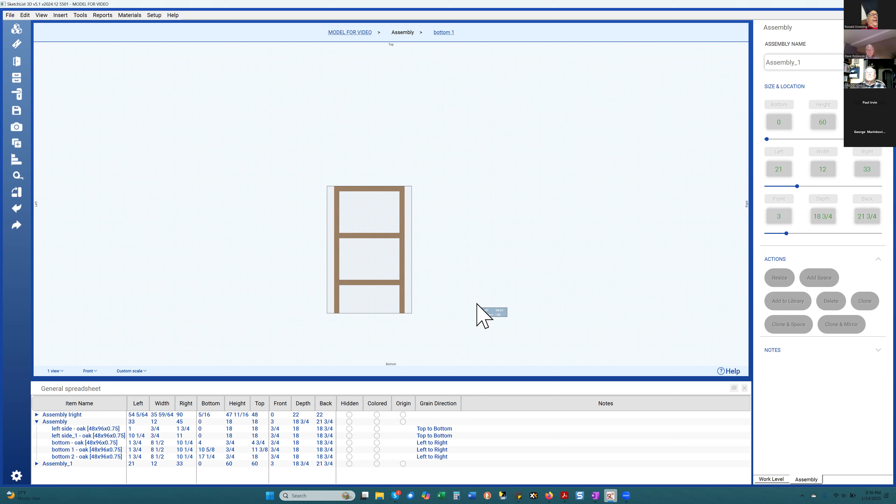Yeah, and thanks for making the discovery that it was the spreadsheet, not the report. Yeah. So how do you show dados?

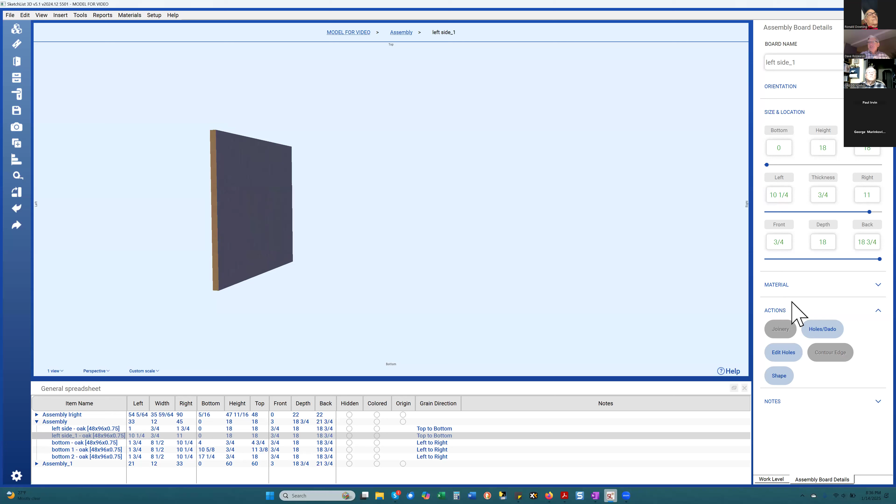Dado? All right, yeah. So you go to the board level. I come here—oops, where'd my board go? There's my board. Oh, all right. When you come back from the shop drawings, it's always in the front view. So what I want to do is take that surface and say holes or dado, because dados are really kind of a halfway hole. And if I wanted that to be up 3 inches, and start it back 2 inches, like that.

I want this to be rectangular. The height is, say, 3/4. The width is going to be 16, like that. And the depth will be, say, 3/8. Okay, now you can save that, and there it is.

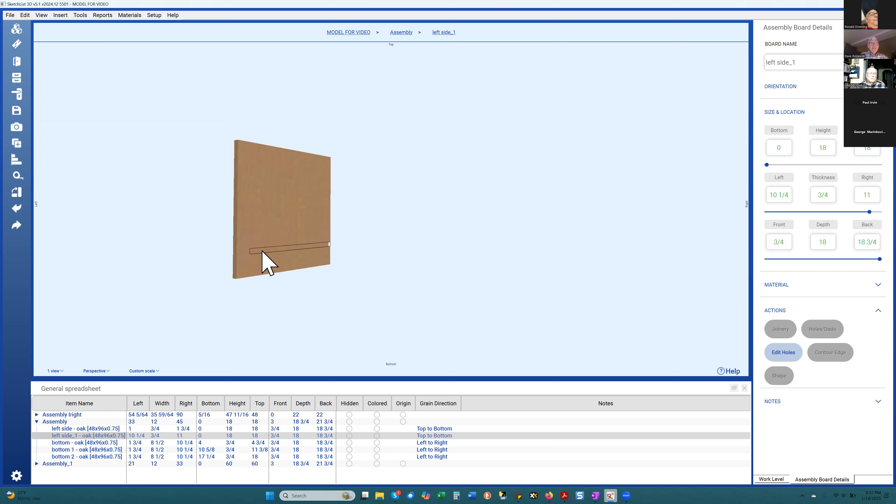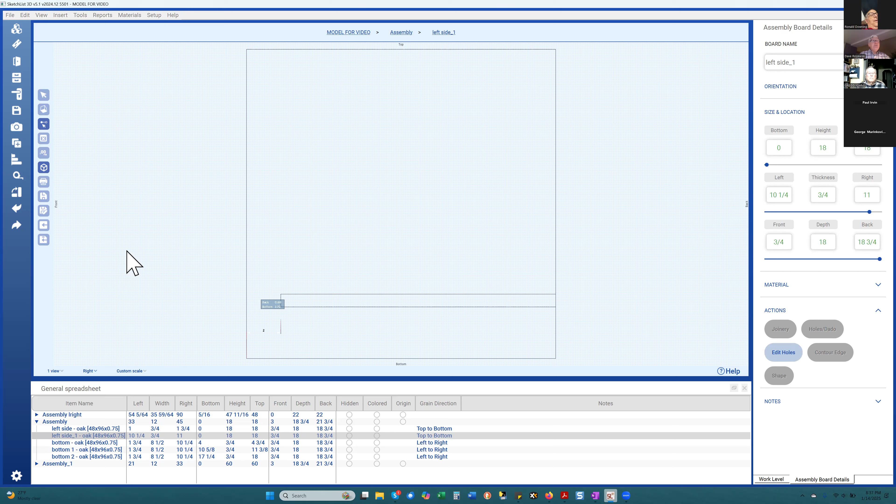But that's in the shop drawing? Yeah, that'll be in the shop drawing. Okay, shop drawing, new—yeah, there it is. Now what I could do is change this to the right view, and the same rules apply. If I want to have from this point to that point, that's 2 inches. Okay, if I want to figure out this line, I think, yeah, that's 3/4.

But I guess my question was, did you design the dado in the shop drawing, not in the project view? No, I did it in the project view. Okay, all right. No, let me show you—there it is. Okay, and the way I did that was I selected this surface in detail mode and put in a dado.

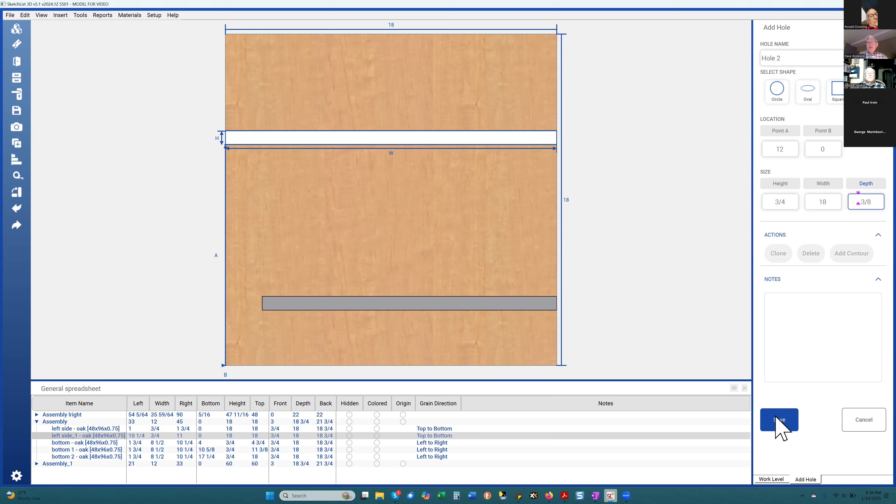So I go to dado on the surface, and what I want to do is say this dado is going to be 12 inches from the bottom, and right from the edge. The height will be 3/4. The width is going to be the full size of the board. The depth is whatever it is—1/4 or 3/4, or no, 3/8. It can't be 3/4 because it would cut the board in half—you'd get an error. And there it is.

Okay, got it? All righty. All thank you. Sure. And then finally, the last thing in terms of reports is the optimized layout.

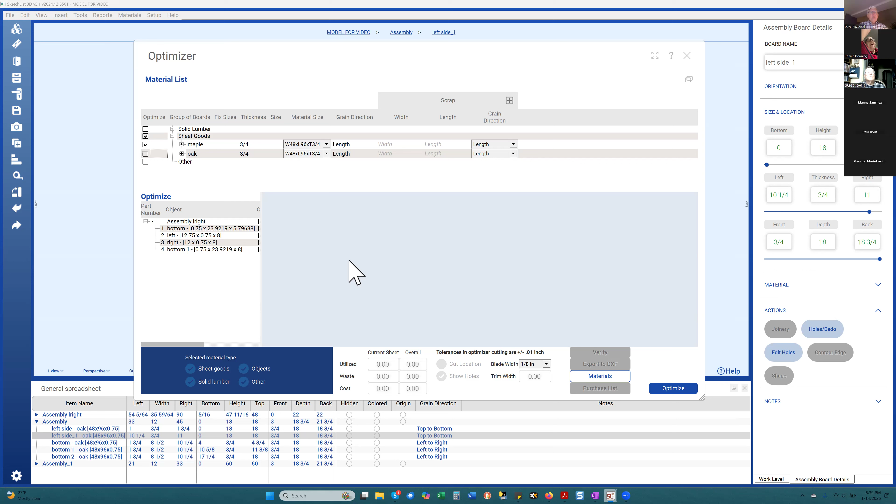And what this does is it takes your parts and lays them out on either plywood or solid lumber. There's a couple different ways to use it, or filters. So I can say, well, I'm not going to do solid lumber in this cut. And in sheet goods, today I'm just going to cut the oak—I'm sorry, the maple. So I cut the maple and I'm all set to go.

Pull this aside, you can see more values and just say optimize, and this gives you the layouts of the cuts. You can ask it to show the cut locations, so you know where you're going to cut them on your saw. You can change the kerf if you want to, if you're running like a CNC machine and you have a 1/4 inch router bit in there.

From here, you can export to DXF if in fact you're running a CNC, and it'll put out the files necessary to import to something like VCarve.

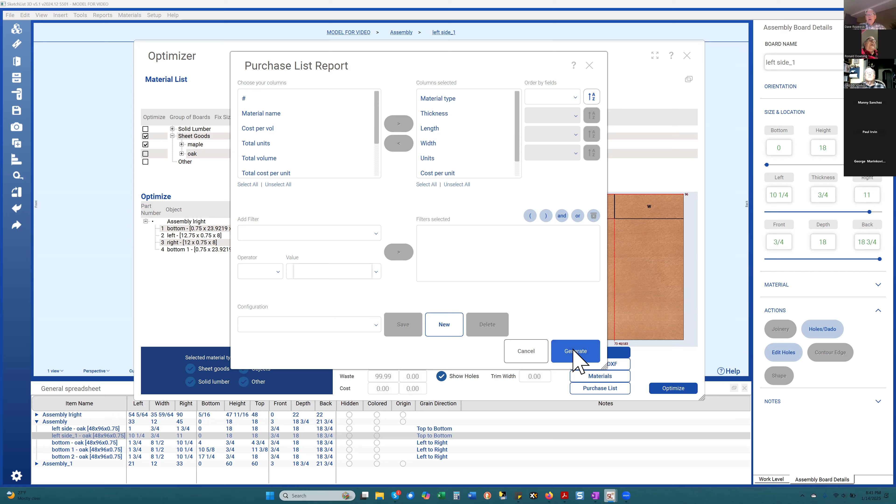Material report—oops, no, I didn't want that. I want purchase list. And if I take, I'm just going to add material name, thickness, width, and units, and put that on the purchase list. And I should put cost per unit, cost per unit, and then just generate it. And it will tell you how much of what you need to buy. Had I put in the database that these sheets are $100 each, it would say 100 times however many sheets were needed. And that's it.